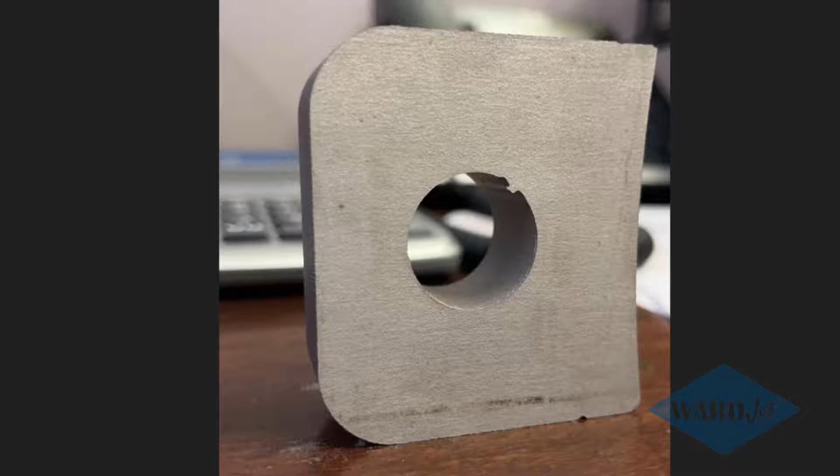One question that comes up periodically when somebody first starts getting into cutting thicker materials is how do I get rid of this nib on the back of my part? This in this picture I believe is 1 inch thick stainless and obviously a pretty significant nib there.

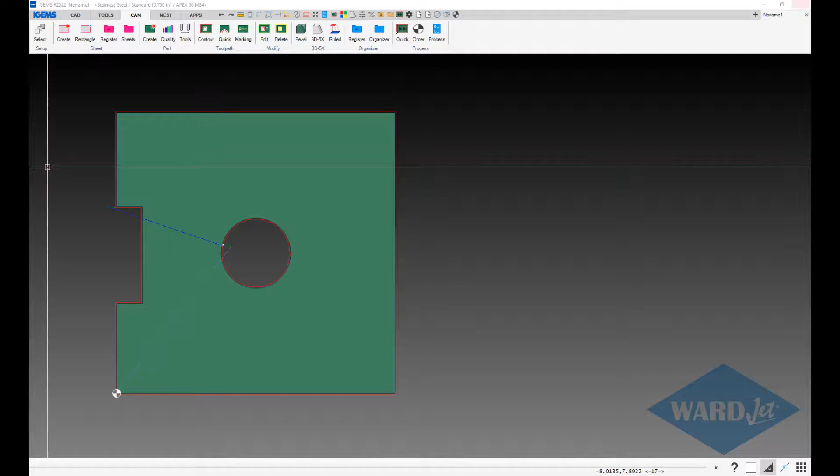So the first inclination would be, well, I must not be cutting past where I let in enough, so therefore I need more over travel to make sure that the stream crosses over where I let in to help remove that. So generally the first step, which makes sense, would be to adjust the over travel distance.

In iGEMS you would go into your contour command, and depending on the lead that you're using, you'd click on your little edit button and depending on what that was, increase it 10, 20, 30 thou, whatever you think might be enough to get the stream to go past where it let in.

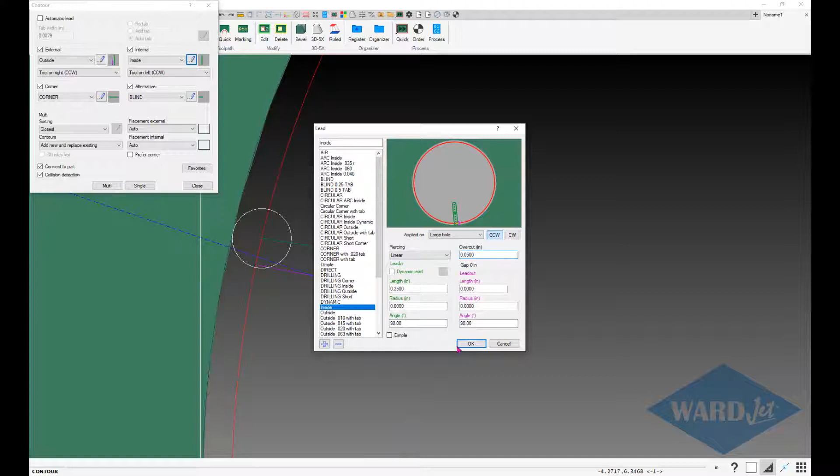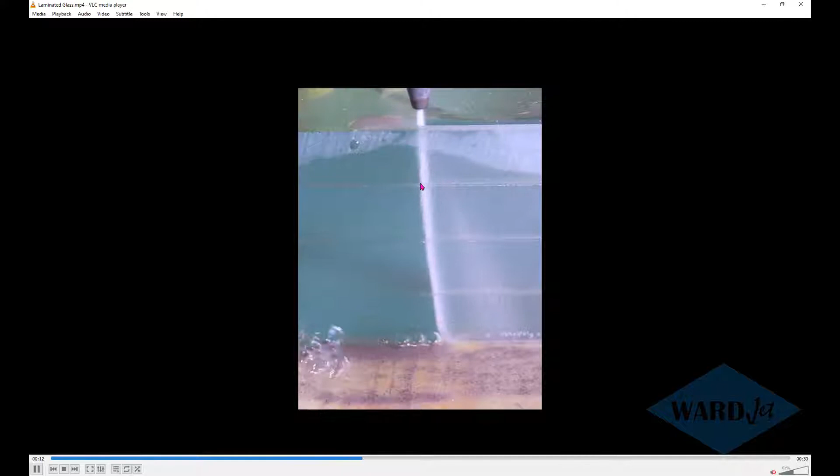However, you actually end up fighting against yourself when you do that, and it's because we have to take a look at the characteristics of the water jet stream. So in this video of cutting some glass, we see the basic concept that the water jet stream at the bottom is going to be lagging behind where it enters the material at the top, and the faster you go, the bigger that difference is going to be, and the slower you go, the more vertical the stream is going to be.

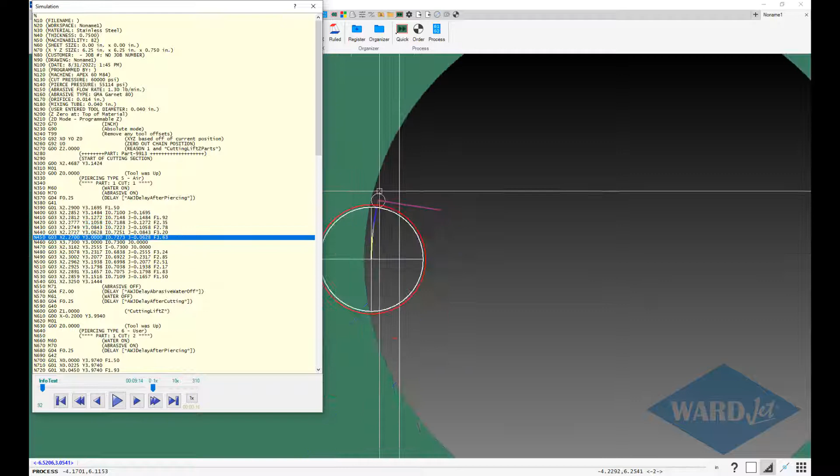So when you increase your over travel, you're fighting that, and then you also have to look at how we slow down when we come to the end of a cut. This white circle that I have here is supposed to represent the 40 thou water jet stream, and if I take a look at the code, basically going around the circle, we do most of it at 3.63 inches per minute, and then as we get towards the end of the cut we start slowing down, and we use a certain number of lines of code to get from the high speed down to what's being used for the low speed.

And if we zoom in here a little bit, we can see that when we're crossing over the edge of the kerf width here from where we let in, there's no material here, and when the stream coming this way hits this point, the stream basically takes the path of least resistance, and that's where you see the stream essentially jumping the kerf at the bottom, leaving that nib of material.

Now when you increase your over travel, as has been done in this part here, you essentially shift where we start doing the slowdown further and further past where we're leading into the part. So by increasing your over travel, you'd actually be traveling faster and faster when you hit this point here and get more of a nib. So right now, for example, we're crossing that area there doing about 2.17 inches per minute.

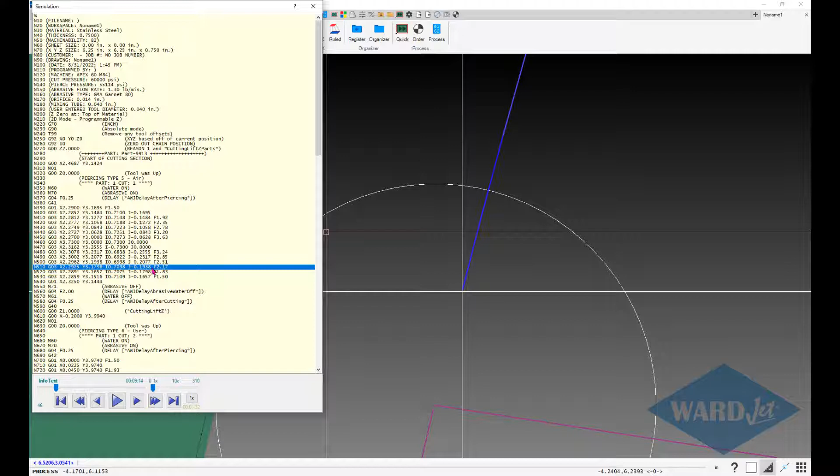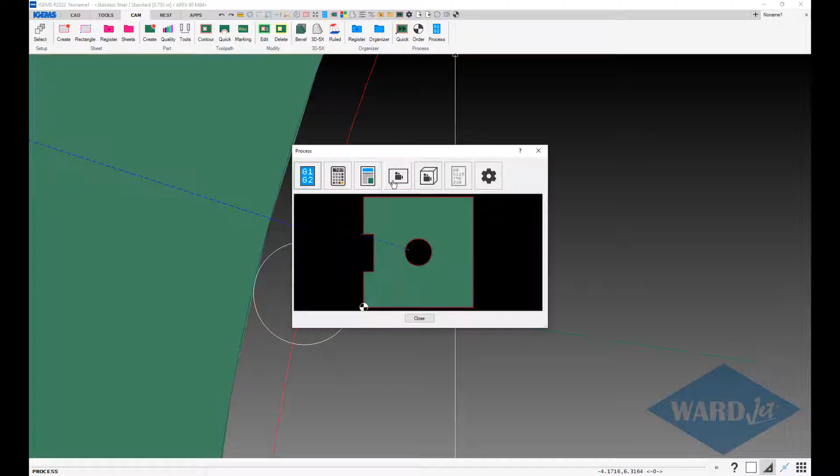Now the other thing you can do is change the speed that you're slowing down to at the end of the cut. So to do that, we'd look into the material file, and this is what we use for the lead in and what we slow down to for the lead out. If you click on edit, you can adjust these numbers.

So if you reduce that over travel number to the 20 or 30 thou and you're still getting nib, then you may need to slow down more at the end. I generally recommend slowing down if this cut is being done at the medium speed, which it is. It's got the 1.5 there. I generally recommend setting the low speed something similar to what the extra fine is. So I would set this low speed to 1.1, and then you'll see this changes orange to indicate that that's been changed, and then that again is what we'll slow down to.

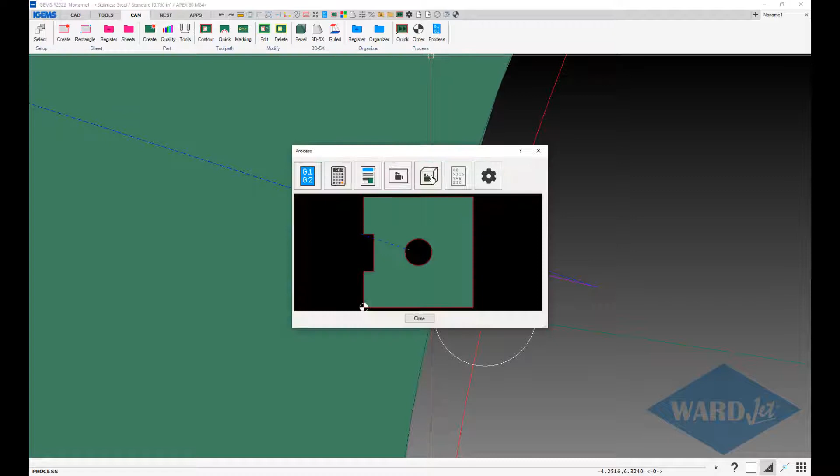So we'll go ahead and take a look at this again. Here again we start slowing down. We're doing 1.8 to 1.58, so we might actually start crossing the curve at this point. 1.34, 1.1. So you can do that.

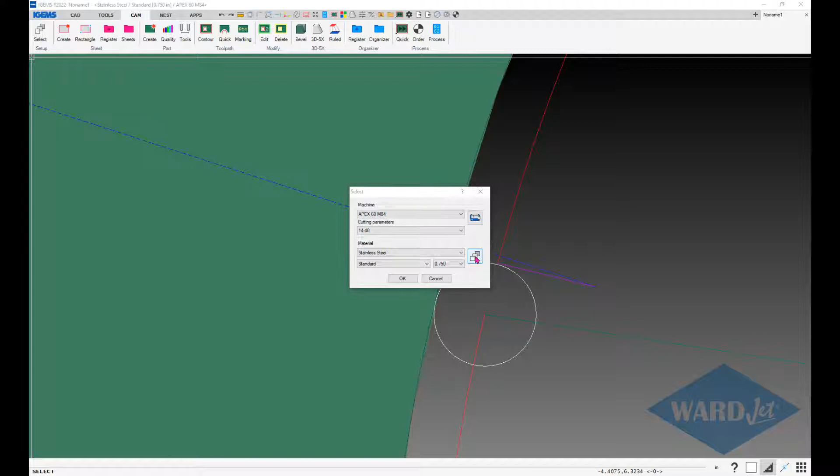Another thing you can look at adjusting if you need to, I would say speed is the primary thing after you've done the over travel speed. And then you can also look at changing this corner distance. This is how far from the end of the cut that we start slowing down. Also, when we're approaching a corner, that's how far from the corner we start slowing down.

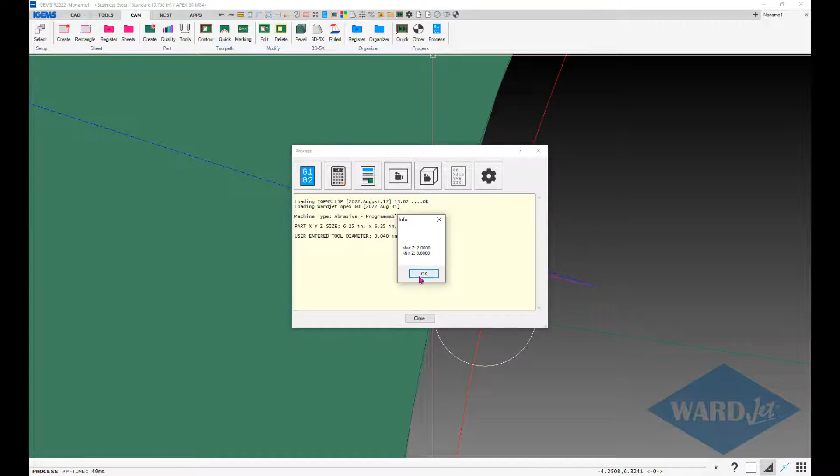So if after dropping down the low speed, adjusting that over travel number, you're still getting some nib, I would suggest first maybe doubling this number. So we could do 0.226, something like that. And then that will just give more distance to allow the bottom of the stream to catch up with the top as it slows down to that low speed. So we're doing 1.9, 1.5, 1.3 there, and then 1.1.

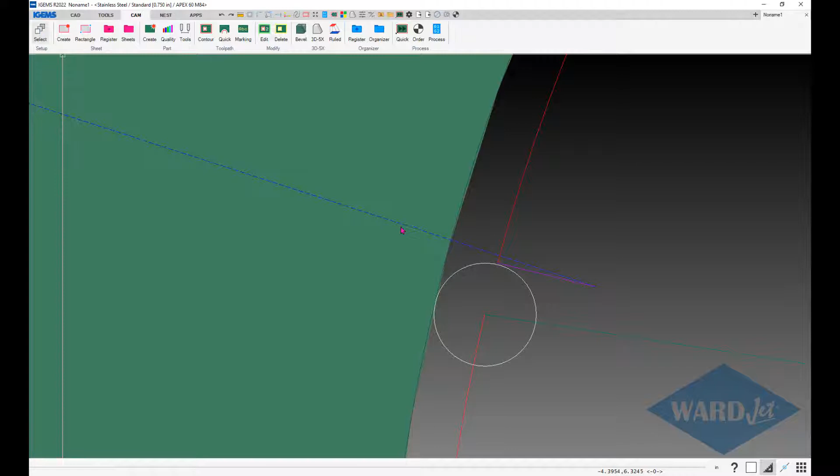So those would be the three things that I would recommend that you look at. Number one, over travel. Number two, the low speed. And then number three, increasing this corner distance.

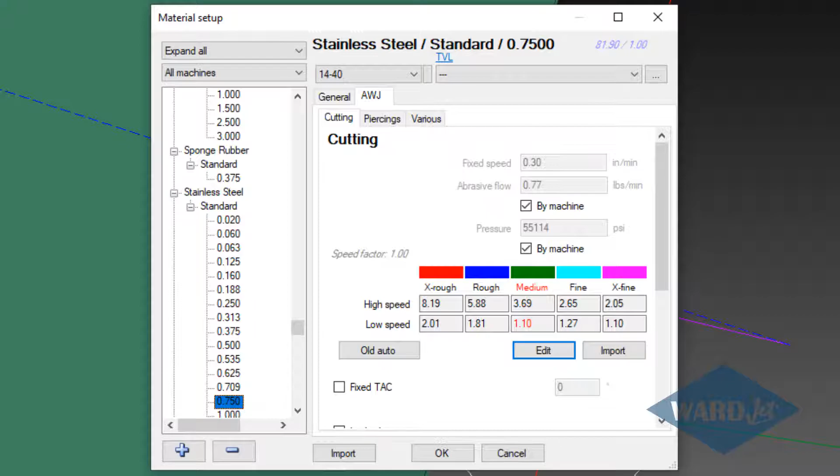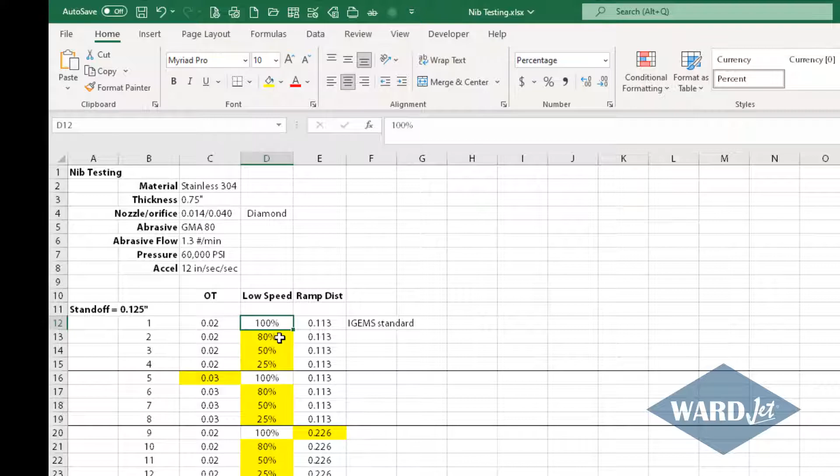I've got some pictures of some tests that I did adjusting those parameters. This is a piece of 3/4 inch stainless steel, and we're looking at the back side of the part, and this would essentially be default parameters, 1 through 4. I can pull up the spreadsheet that breaks this down. On 1 through 4 we're using 20 thou over travel, and then the low speed at the standard 100%, 80%, 50%, 25%. So you can see here the nib starts to improve on 5 through 8 using the standard ramping distance, a little more over travel.

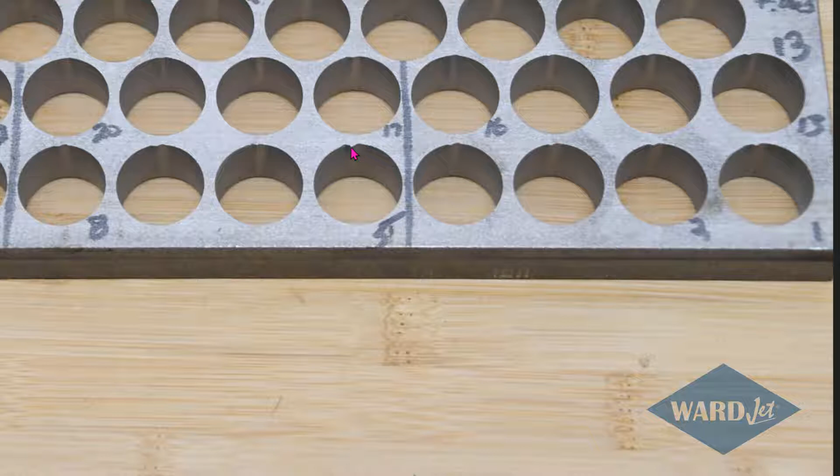And I think you'll see here, especially at the default 100% low speed, a little bit more of a nib there. So even at 30 thou versus 20 thou, you're getting a little bit more nib. And then again, we're decreasing the low speed as we go along here.

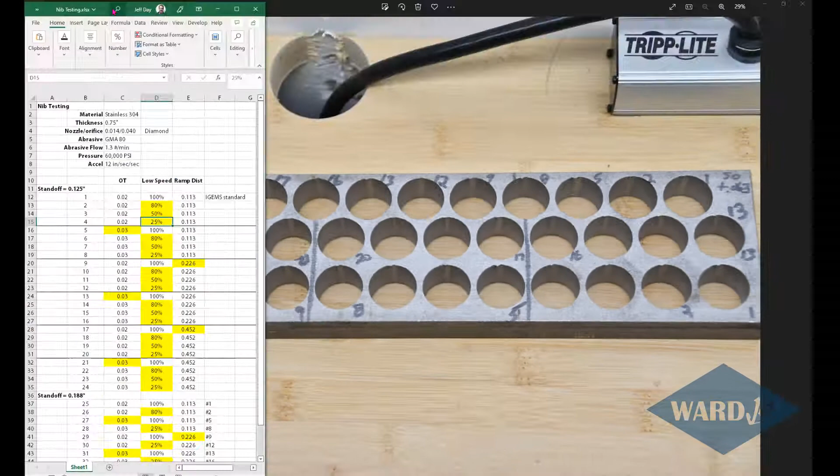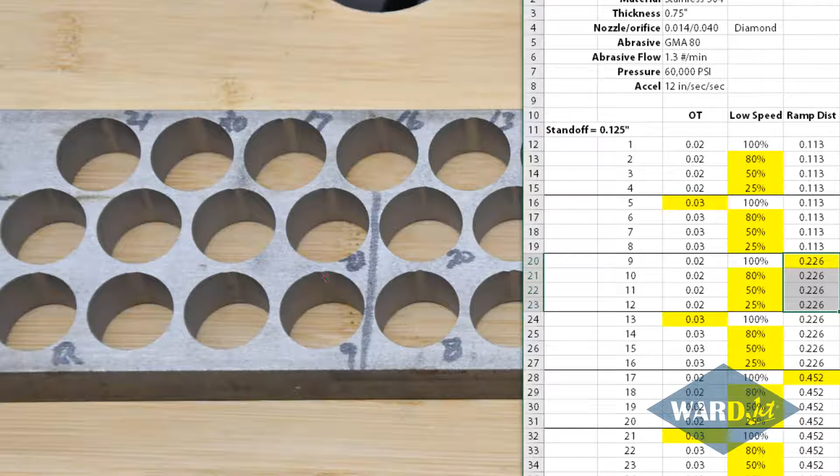And then 9 through 12, we're back to the 20 thou over travel, and we've doubled our ramping distance. So here number 9, slightly better probably than number 1. Let's say number 10 here is a little bit better than number 2, and 11 and 12 look pretty decent. Let's see if I can get this positioned so we can see everything here.

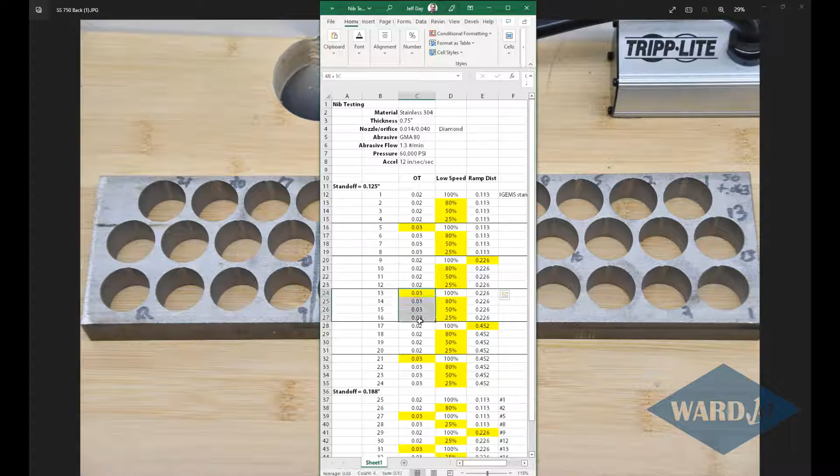And then in the next batch, 13 through 16 in this row here, we're back to the 30 thou over travel with the doubling of that ramp down distance. And here you can see still a bit of a nib, maybe a little bit less than what we had initially. And then again, this improves as we go slower and slower with that low speed.

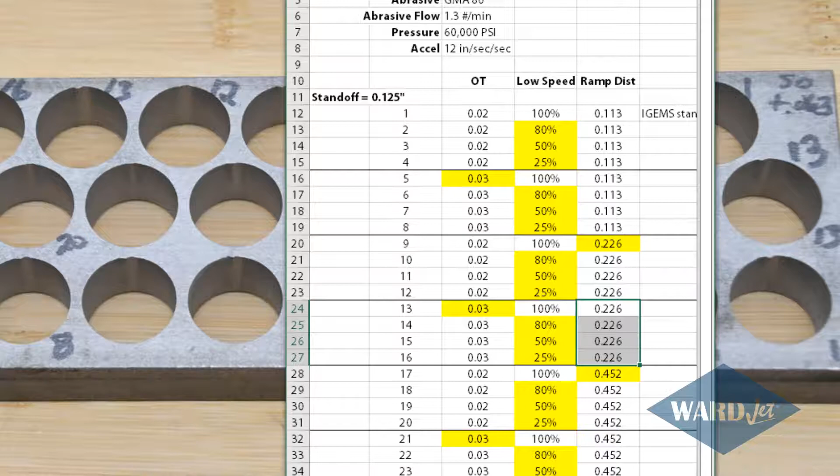And I think the best holes on the back side that we got were probably maybe these two, maybe these 4 here. So this would be 21 through 24 here. So in this case we're using 30 thou over travel, and this had basically quadrupled the ramping distance from the default value. This may add a fair bit of time to your processing, so in that case maybe the 9 to 12 range here with the doubling of the ramping distance and the low speed would probably be the way to go.